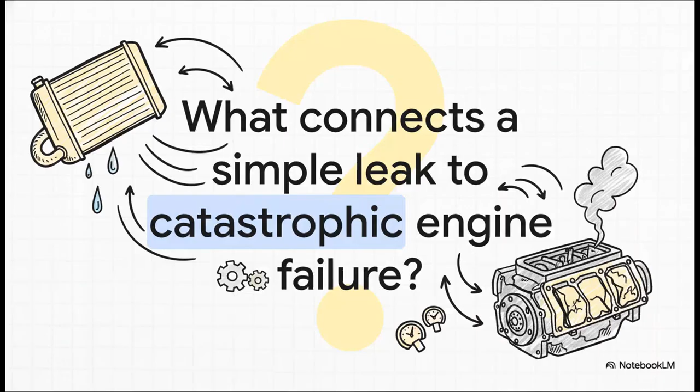So think about this for a second. What's the real connection between a simple little drip from a hose and a completely trashed engine? Well, the answer lies in the incredible pressure and intense heat that this system is constantly battling every single second the engine's running. That's why understanding this system isn't just a suggestion, it is a hard and fast requirement.

You know, it's funny. The cooling system is so often overlooked. It just kind of does its job in the background. But it is the silent guardian of the engine. A failure here? That's not some minor inconvenience. It can be the end of the line for that engine.

So to make sure that never happens on your watch, we're going to break down 5 unbreakable rules that every single professional needs to live by. And that brings us right to our first and, honestly, the most fundamental rule of all.

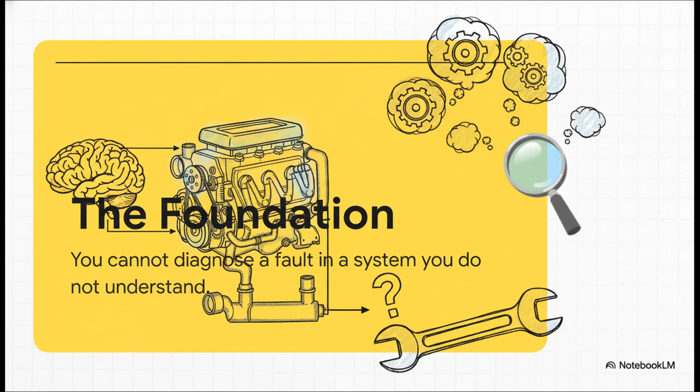You have got to know the system. And I don't mean just being able to name the parts. I mean a deep, foundational understanding of how it all works before you even think about picking up a tool. Look, it really boils down to this simple truth. You cannot diagnose a fault in a system you do not understand. Period. A real diagnosis starts up here, with knowledge, not in your hands with a wrench. It's all about figuring out the why, long before you start hunting for the what.

In this foundation, it goes way beyond just naming parts like the water pump or the radiator. We're talking about understanding the physics behind it, how heat actually moves through conduction, convection, and radiation. It's knowing the crucial differences between coolant types and why getting that water ratio exactly right is so incredibly important.

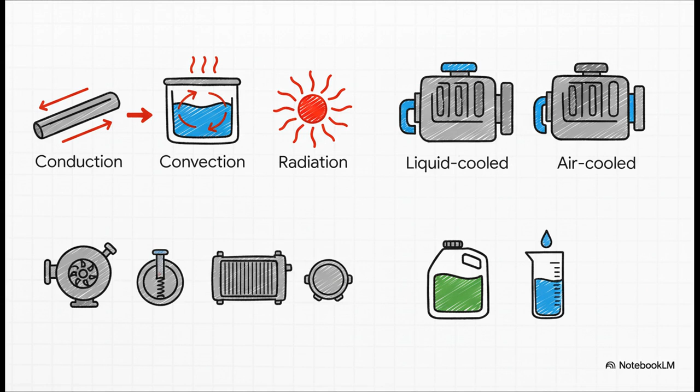Okay, so you've got the knowledge. What's next? Well, our next rule is all about safety. And folks, this one is absolutely non-negotiable. Rule number 2 is respect the pressure.

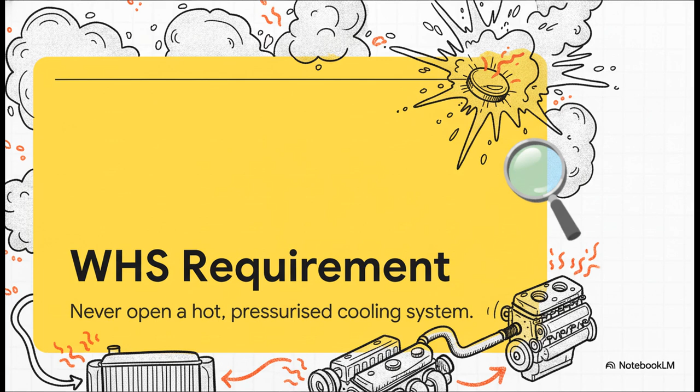Let me say this as clearly as I can. Never, ever, under any circumstances, open a hot, pressurized cooling system. When it's at operating temperature, that system isn't just holding hot water. It's containing superheated, pressurized coolant and steam that can and will explode with terrifying force.

So what does that mean in practice? It means you follow the correct safety protocol every single time. You let that system cool down all the way. You physically verify that the pressure is gone. And only then do you use the proper technique to open it. There are 0 shortcuts here.

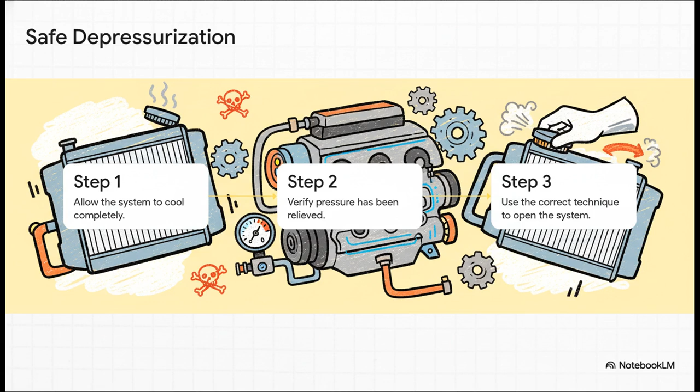None. And if you ever, for a second, think about cutting a corner on this, I want you to remember this fact. This isn't some theoretical what-if danger. It's a very real-world risk, and it is a leading cause of serious life-altering injuries in workshops. Respecting that pressure isn't just good practice, it's what keeps you in one piece.

All right, let's move on to rule number 3. This brings us back to the mental side of the job. Once it's actually safe to work on the car, your first move isn't to start replacing things. It's to diagnose, not guess.

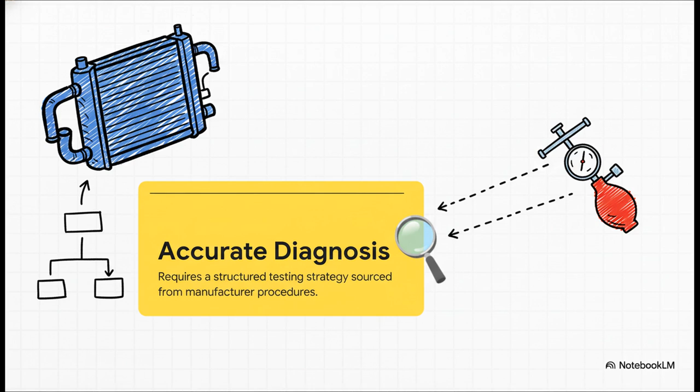See, professional diagnosis isn't some kind of mysterious art form. It's a science, and it requires a methodical, structured strategy. You don't just poke around and test things randomly. You follow the manufacturer's procedures to build a logical, step-by-step path to the root cause.

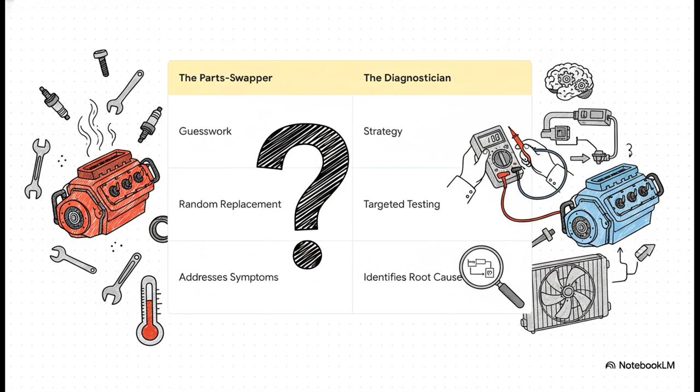So what does a strategic approach actually look like? Well, it means you're using the right tools for the job. You're diving deep into scan tool data, looking at live data streams. You're using pressure testers and combustion leak detectors. You might even be using thermal imagers to literally see how heat is moving or not moving through the system. It's about gathering hard evidence.

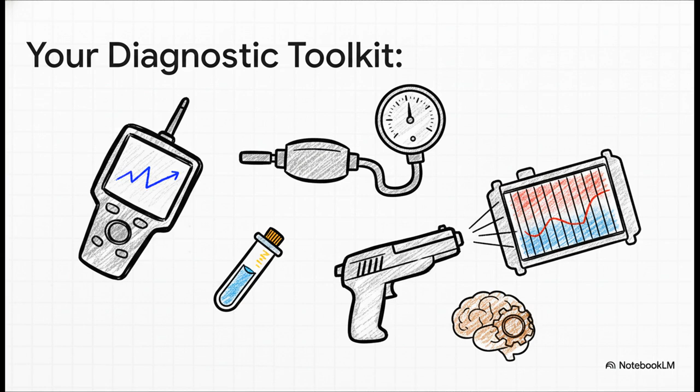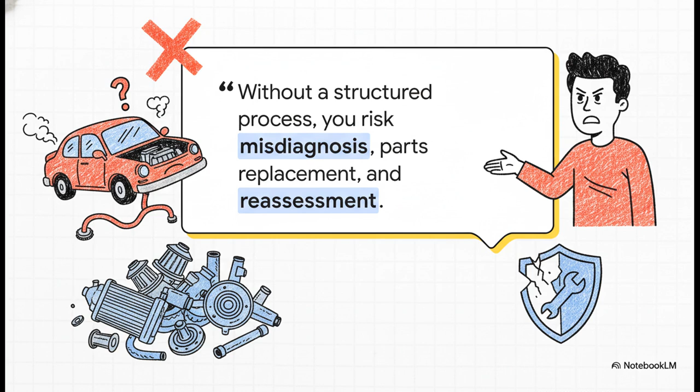And the consequences of skipping this process? Oh, they are huge. You risk getting the diagnosis completely wrong, which means you waste the customer's money on parts they never even needed. And worst of all, you risk that vehicle coming right back to the shop with the exact same problem. That's bad for the customer, and it's terrible for your reputation.

Okay, so you followed the process, you did the work, and you've nailed the root cause. Awesome. Now we move on to Rule 4, which is all about the hands-on part of the job, and that is repair with precision. This means every single step of the physical repair has to be done by the book. You're following manufacturer specifications for everything, from how to remove a part to the torque specs on the bolts, and especially when it comes time to refill and bleed the system.

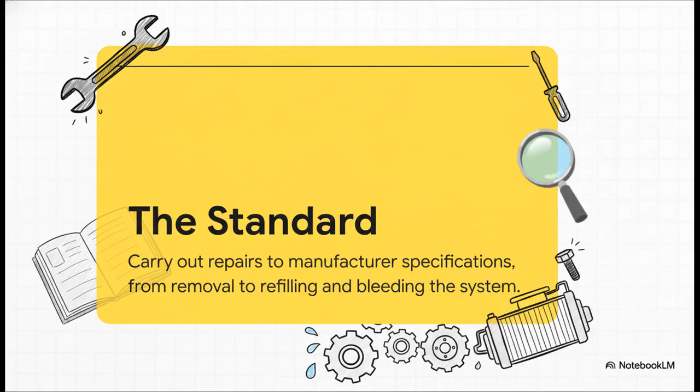No corner cutting. This process seems pretty straightforward on the surface—find the right info, replace the part correctly—but I'm telling you, steps 3 and 4 are where so many good jobs go bad. Using the right coolant and the right water mix is vital, yes, but bleeding every last bit of air out of that system, that is absolutely, positively critical.

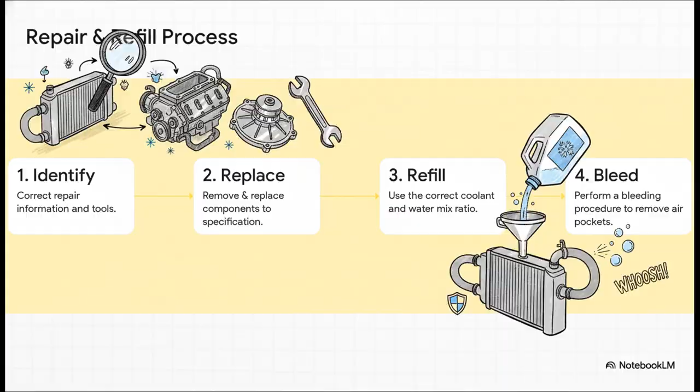Because if you don't get all that air out, this is what happens. A single air pocket trapped somewhere in the engine can create a massive hotspot, basically blocking coolant from getting where it needs to go. And that can lead directly to overheating and the exact catastrophic engine damage you were trying to prevent in the first place. A tiny oversight that can cause total failure.

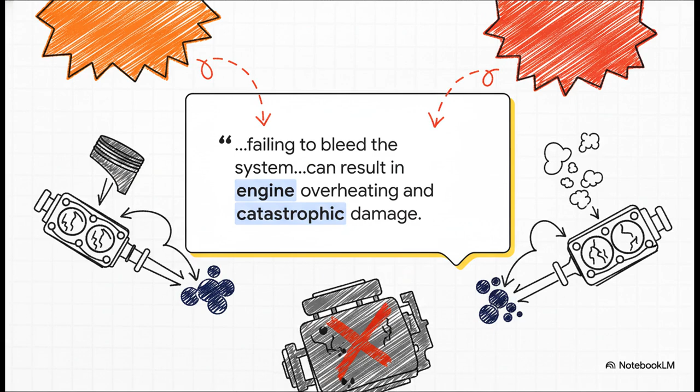And that brings us to our 5th and final rule. This is all about the professional finish. See, the job isn't over when you put your tools away. You have to test, you have to verify, and you have to document. Make no mistake about this, verification is not an optional step. It's not an afterthought. It is a required task to prove that your repair was successful and the vehicle is safe. It means you have to put that system through its paces and confirm it works correctly under real-world conditions.

So what are you checking? Everything. Are the cooling fans cycling on and off at the right temperature? Is the new thermostat opening up exactly when it's supposed to? You have to pressure test your own repair to make sure there are no leaks.

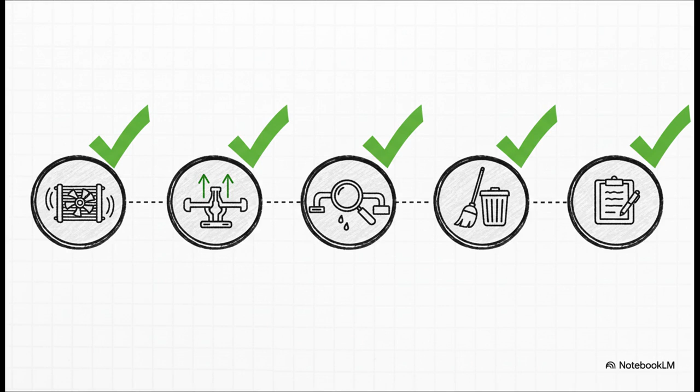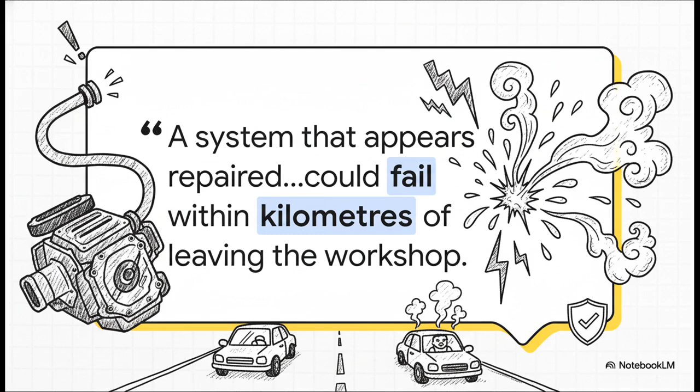And then, of course, you clean up your work area, dispose of the old coolant properly, and you fill out the paperwork. And why is this so important? Because a system that looks perfectly fine sitting there in the workshop could spring a leak and fail just a few kilometres down the road if it hasn't been properly tested under pressure. This final step protects the customer, it protects their vehicle, and it protects your professional integrity.

So after all that, we end with this question. These 5 rules, they're about more than just fixing a cooling system. They're about a professional mindset. They draw a very clear line in the sand. So you have to ask yourself, are you building your career on guesswork, or are you building it on true craftsmanship? The choice is yours.